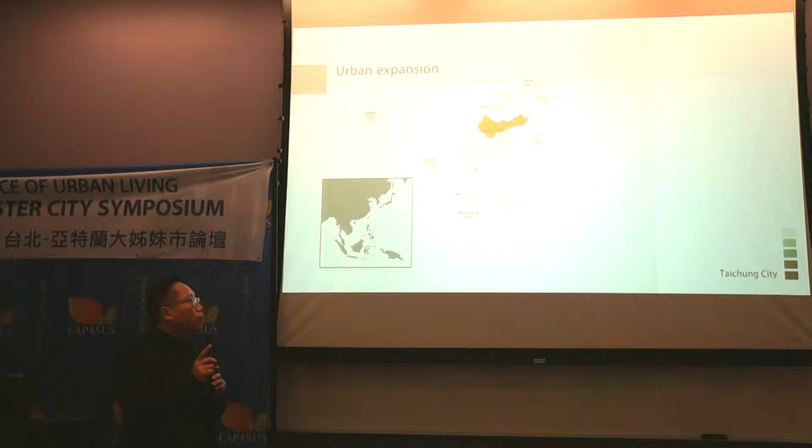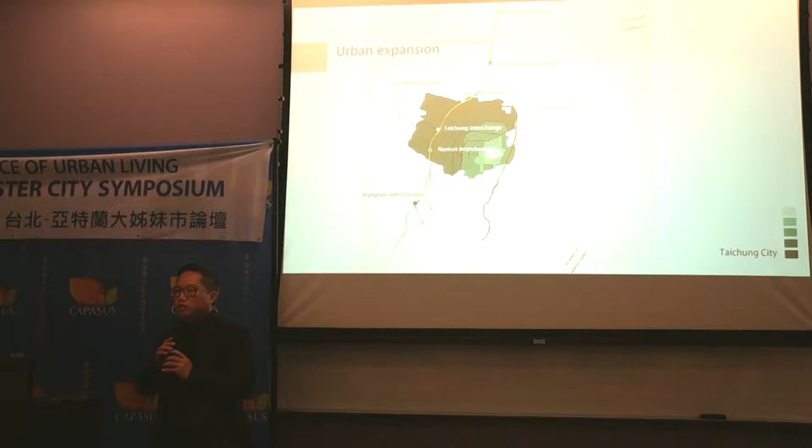Taichung is a city of 3 million people in the center of Taiwan Island. When the last mile of Taiwan railway system was connected in 1908, Taichung started to boom and grow well, and just like other cities of the world, it kept expanding and constructing. All the traffic system was built, and interchanges and superhighway stations brought people to the suburbs.

The government and funds invested in the suburbs and brought people outside of the downtown, so the downtown got abandoned and vacant.

Since the change is destined for the city, what can architects do for it? Still design buildings, or be accompanied with the urban evolution?

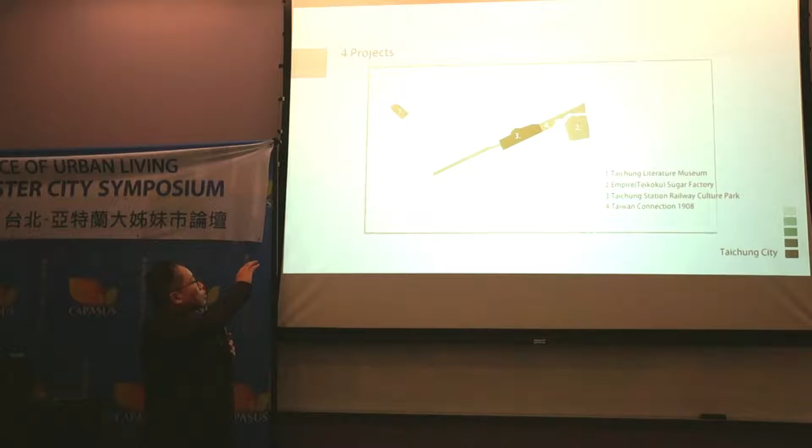So the following 4 projects are what I'm doing right now for my city, all in the downtown and almost around the train station.

I tried to keep all the content and context of history and the elements, and transferred it to literature elements.

The orange one is the site. Half of the site was demolished by the government to become an empty plant, and we just kept 6 dorm houses there.

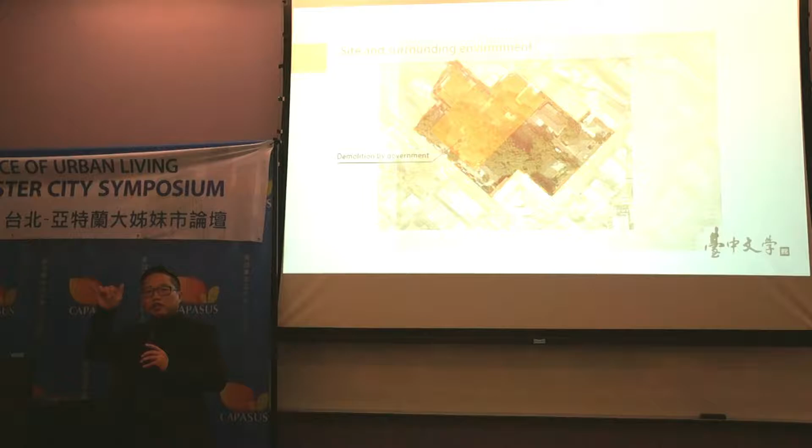Taichung used to be called a cultural city, but not now. Embarrassing. So when I started the design, I had to keep the value system of urban spaces: public, context, history, and sustainability.

So I thought about the boundary of the past. In the past it was fasting/closed. For the future, I have to open it.

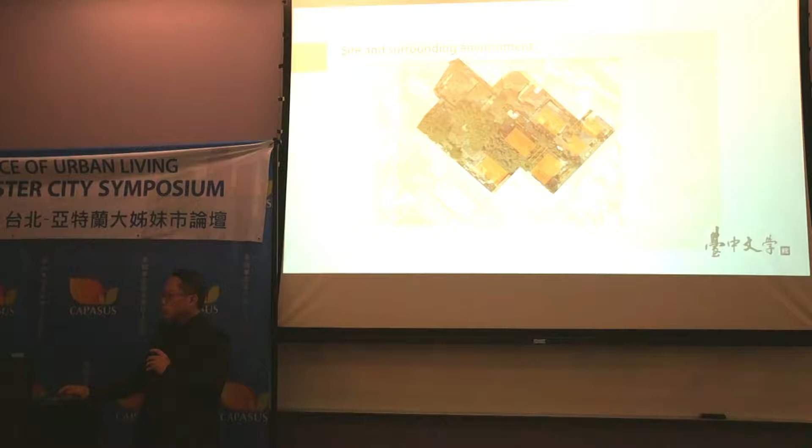You can see the fences separating all the units one by one, but as a whole museum, we have to change it and welcome people from the street.

Let's compare the before and after pictures. It used to be enclosed by the street, and we opened it.

When people saw it was open, they enjoyed stepping into the garden to join all the events inside.

But something about the internal context of the past - you can see they were divided, but we have to open it inside to merge every unit and put it all together.

So we have to find the clues of history. In the past the government demolished it, but I told the government we have to revive it.

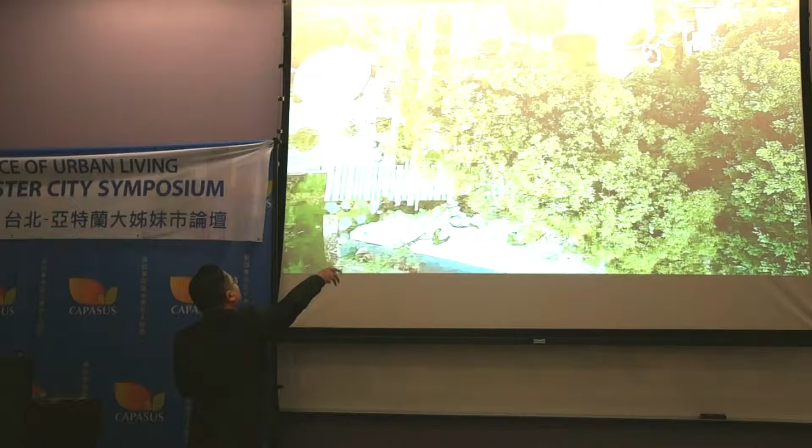Some furniture was put inside, and the pavilion for people to rest in. Many kinds of trees, to inspire people and remind their habit in reading, in writing. You can sit in the pavilion, read your books, play on your cell phone, and just take a snack.

So people enjoy it, and it attracted 1 million people to visit here in the past 4 years.

Okay. The second project that I made is the Empire Sugar Factory.

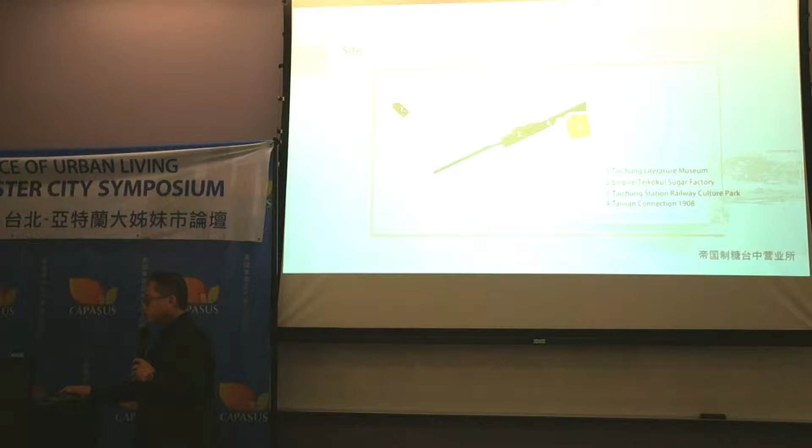The gray belt is the railway station, the railway road of Taichung. It separated the city into two parts, and the sugar factory is in the industrial area in the backside of the city.

It stopped its production in the 1990s and was acquired for a huge commercial project, but it failed because of the financial crisis. So the site was abandoned for 2 decades.

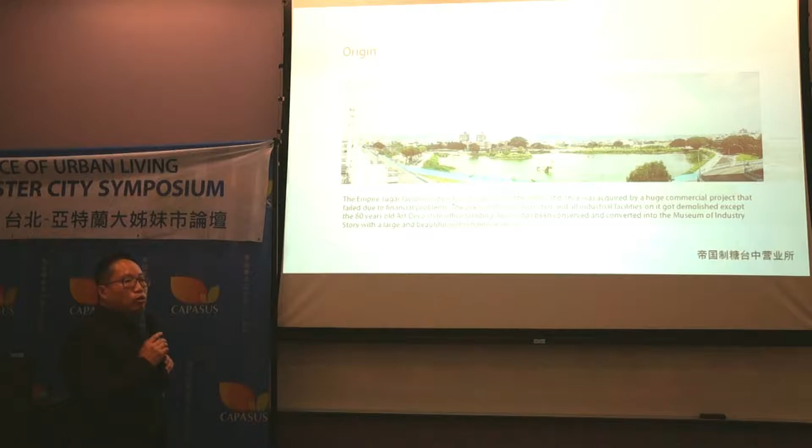So now the building has been conserved and changed into a museum of industrial history with a large and beautiful surrounding.

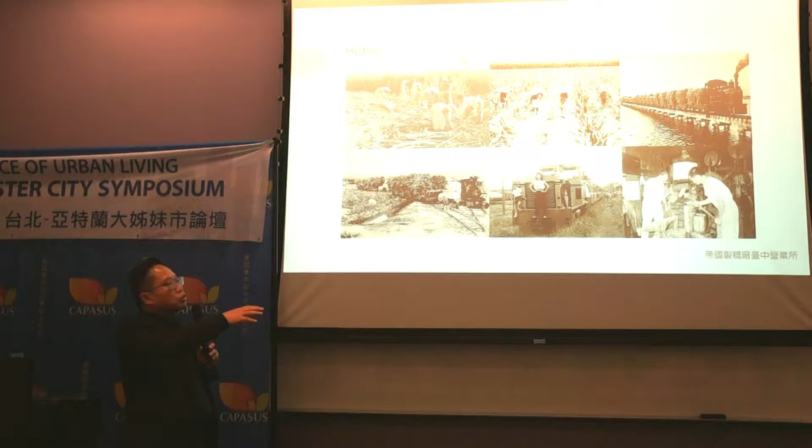Most of the history has been demolished. Now we've kept some of it. There's a section just at the back side of the train station.

Abandoned for 2 decades, but it's beautiful in the decorations outside, and in some details of the truss and its tile.

So the first mission for me is to restore the historical building. I repair it, and more than restoration, you've got to reuse it.

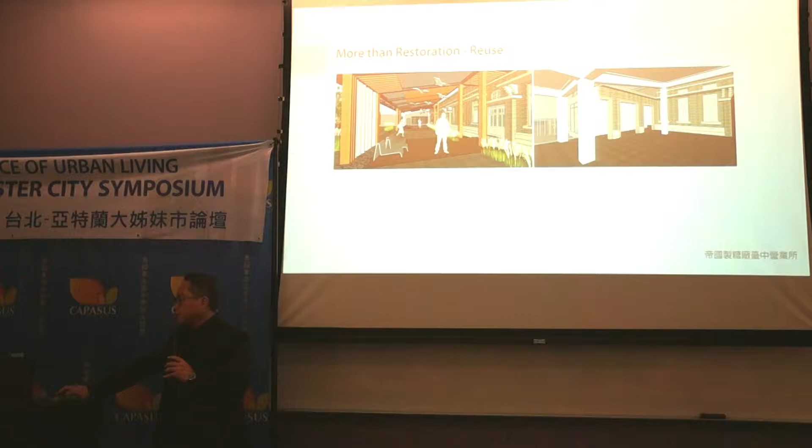A restaurant beside the lake, and more than that, we have to create open spaces and beautiful lights at night.

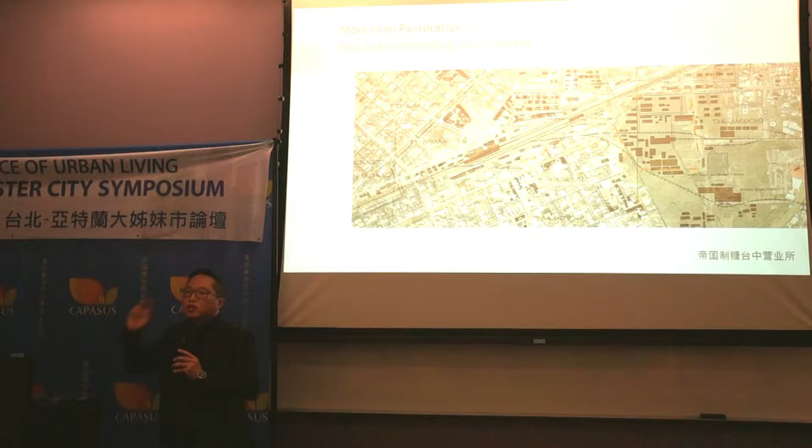And something about the surrounding and the city. So we have to consider the relationship connecting the surrounding district, even the surrounding town.

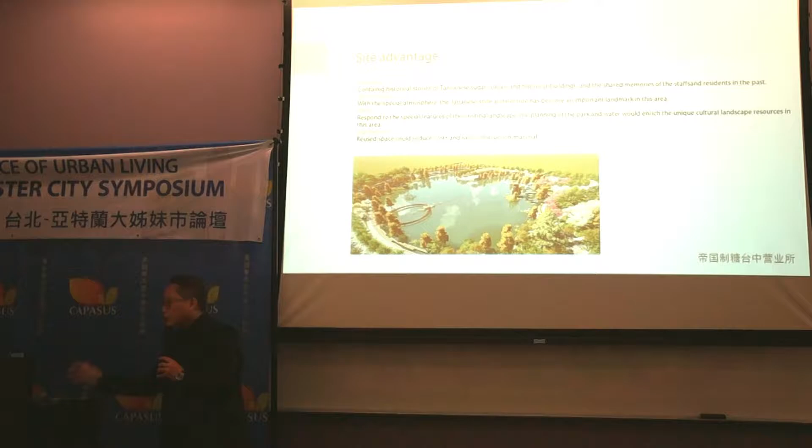So some of the historical clues have been kept. We can say it has the potential of memory, historical buildings, and a park for people, and a setting for children. So there's a master plan drawing the corners, the spots, and the paths of the park.

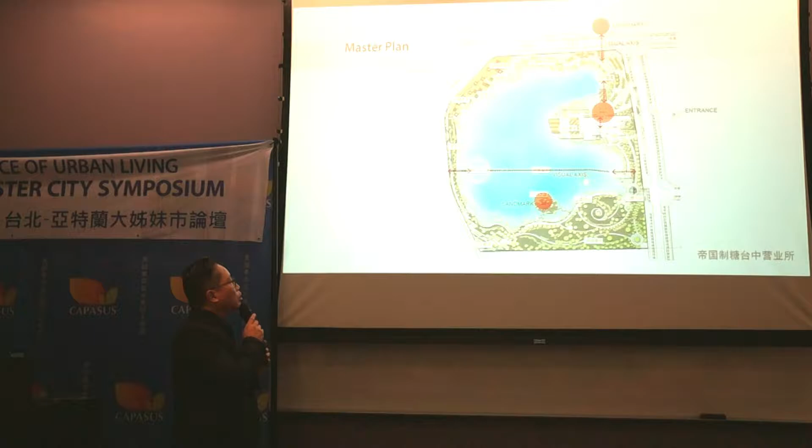The master plan includes a very important clue: the tracks of the railway from the sugar factory to the railway station, which were removed.

So we have to highlight the old buildings to be the symbolic things in this park, and represent the trace of the railway from the sugar factory to the train station.

That way we can show the connection to the past, the industry area and transportation.

Bridges were made for people to enjoy, and the waterfront is always popular, along with the forest and the plaza. But the functional purpose of the pool is for flood detention.

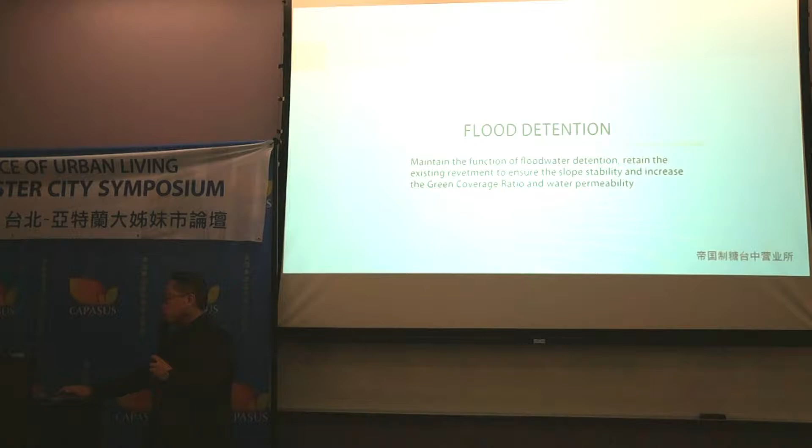In the waterfront, people can sit here and enjoy the water. So it will become a very, very good environmental education spot for the city.

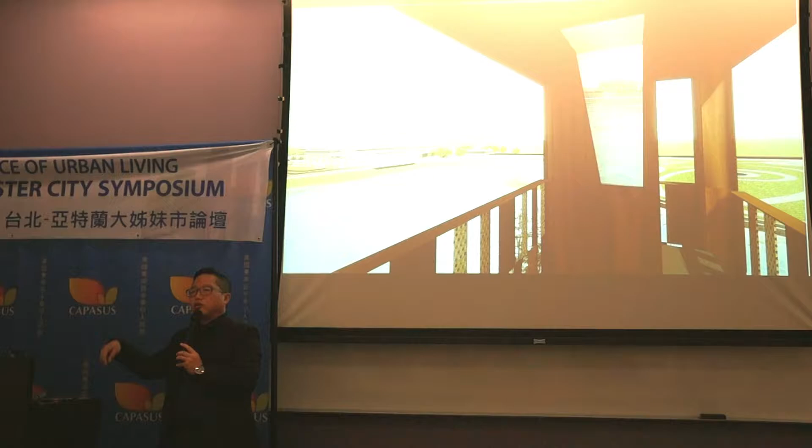We made a tower for people to step up and take a whole overview of the surroundings, so they can know the connection between the sugar factory park and the Taichung train station.

All we have done is for people, for humanity. So people walk in here, enjoy it, and find themselves and find the history of this place.

Let me show you a video.

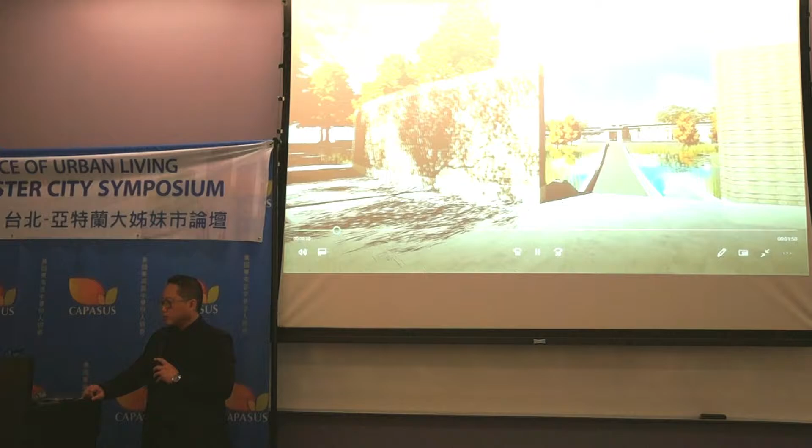So we got the orientation from the train station to these old buildings and got some waterfalls beside it, and some platforms for people.

So we made many biodiversities in this park. The fountains, the water gate, and made some paths in the forest. And when you step across, step on the bridge, you can step on the tower and just look all over the surroundings.

So it changed from abandoned factory to a popular park. It's under construction and will be done this year, the end of this year.

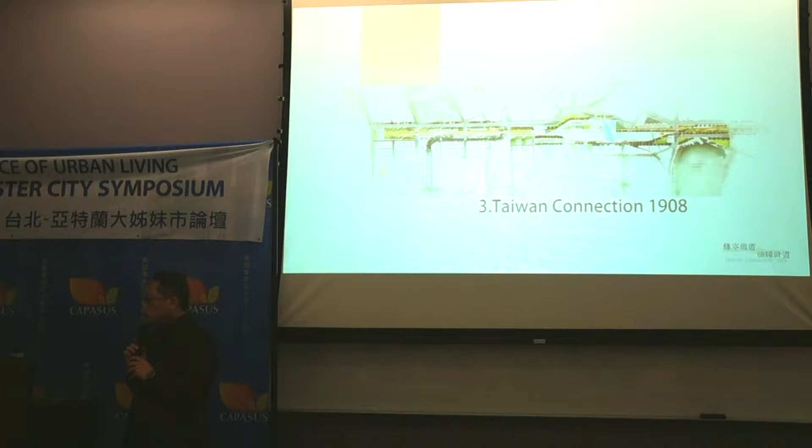Then the third project I have to show you is Taiwan Connection, 1908. The site is the old railroad. 15 years ago, the Taiwan Railway Administration made a decision to elevate the railway.

So we got something to do for it. So let's get architect, me, and mechanical, and some engineer and expert join this project. The total distance is 1 mile, in the center of the downtown.

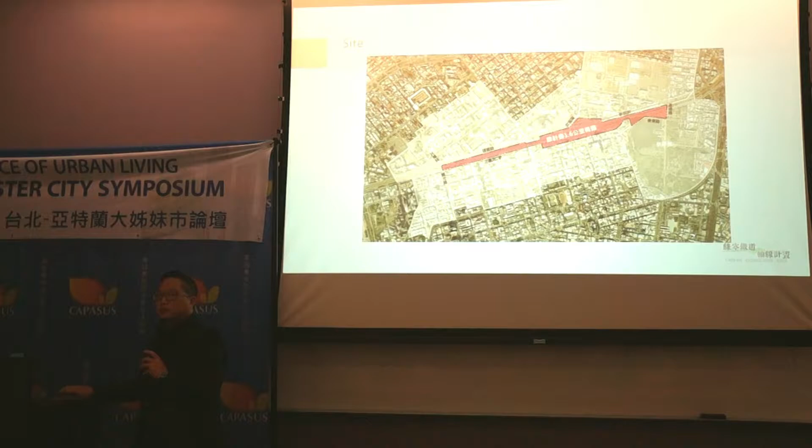It's the birth of Taichung city. Just because it's just like Amazon, it's a transportation platform for this city. So many historical elements are still kept today.

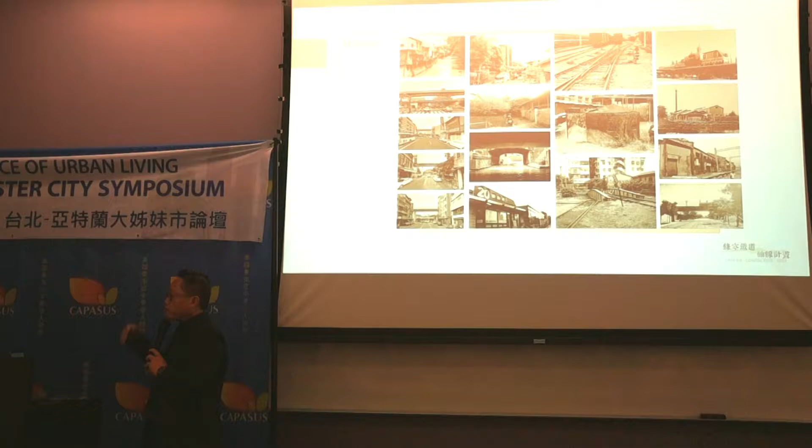So how can I keep it? For the memories of the past and for the future. So people start to think there should be something we can do for it. We have to preserve it, not just only because the parking lot for the residents.

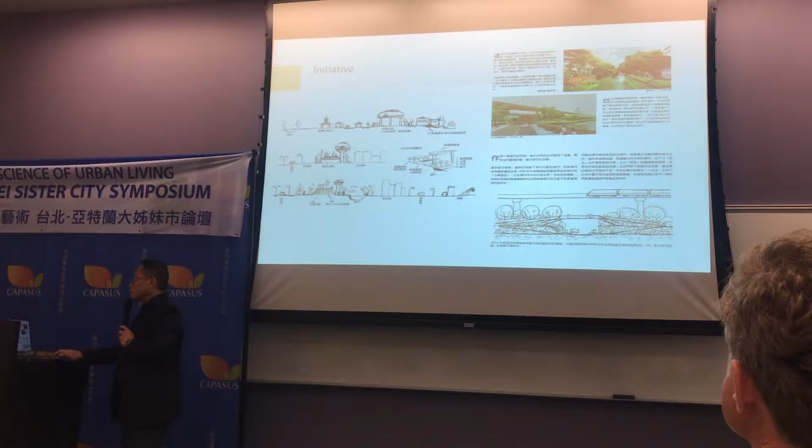So we start our initiative and do a lot of things to tell people the importance to keep it. And the tour guide, the newspaper, and many speeches and workshops, and tour, and farewell concert.

That movement attracted many experts to join us, including architects, railway experts, an engineer, and the retired staff of the TRA. Then the Mayor Lin caught the idea and took the initiative and turned it into the policy of government.

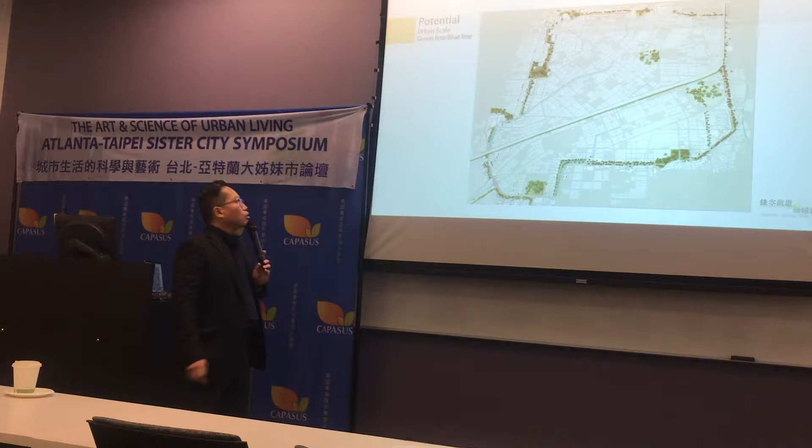The government thinks they want to make a green circle just surrounding the downtown, and connect all the important spots of the city. But it's a long distance, it's just a big circle.

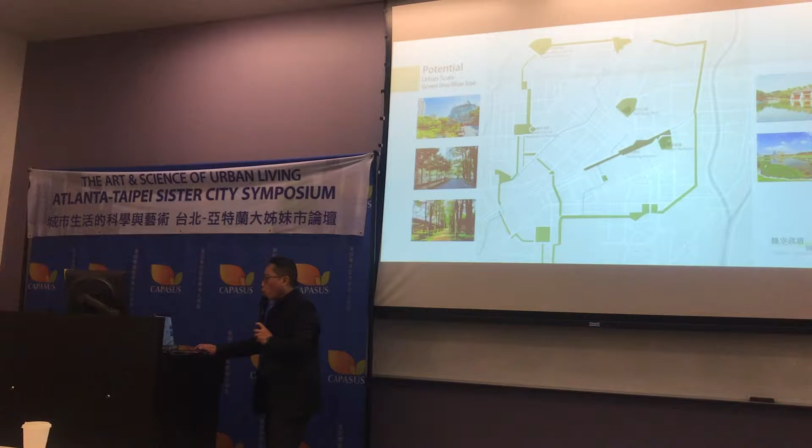And when the railway is conserved, something different, something fun happens. And I see people move around the downtown. You can choose a small circle, a medium circle, a big circle, whatever you need.

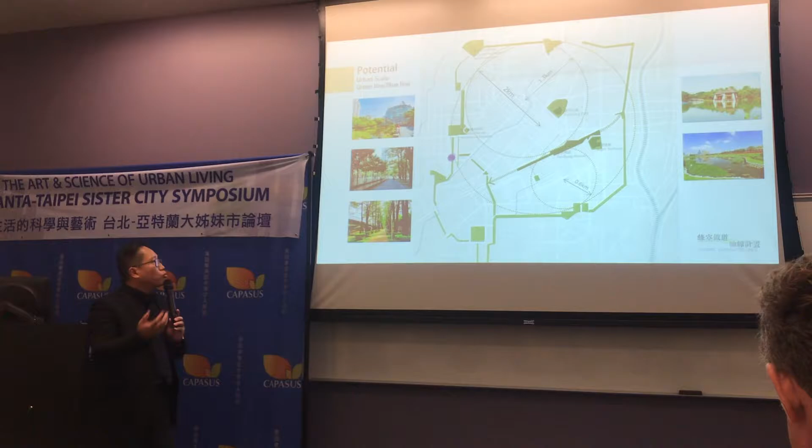So the downtown became very interesting, with many opportunities and options for you to move. So all the historical places, buildings can be connected as well. You can see.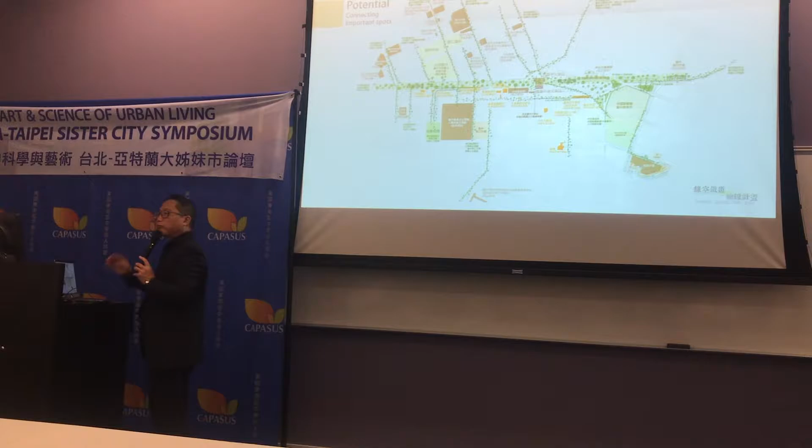So people can get a lot of fun in the movement. Communities surrounding start to think how to connect their communities to the railway's green belt. And different tour routes happen.

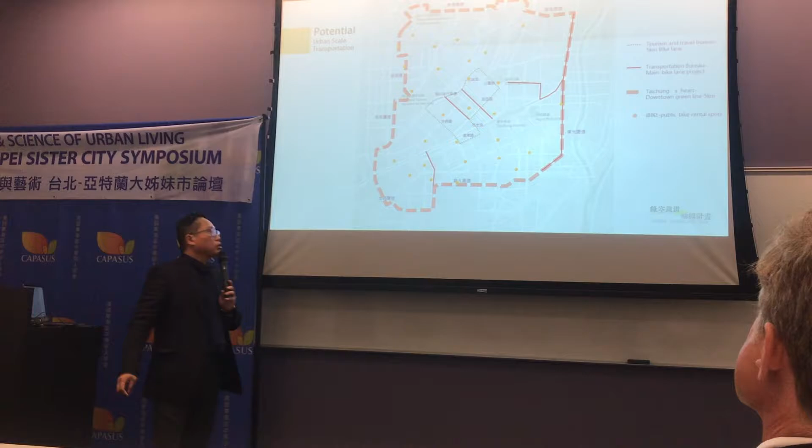So this city in the past is for cars, and now it's for people. And the government tried to build a bikeway all around, but it cannot make it in the downtown, in the center of the downtown. But now you can, and now you make it.

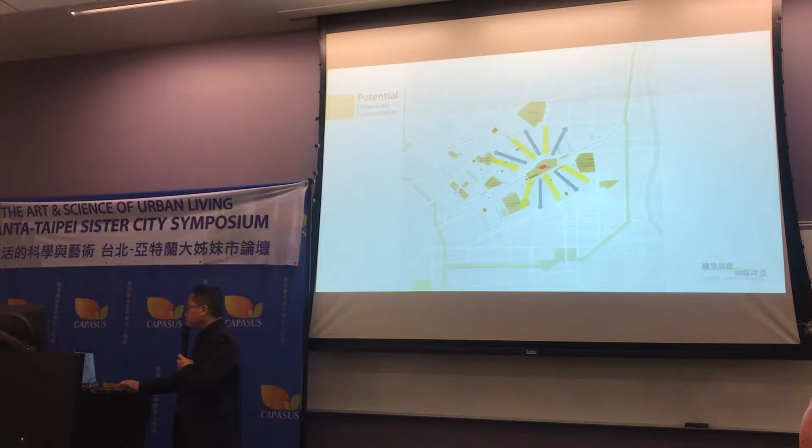And in the past, it's the only way for people to come and go to the train station. But right now, we have different options, within the downtown area. In the past, the railway separates the city into two parts. It's a barrier.

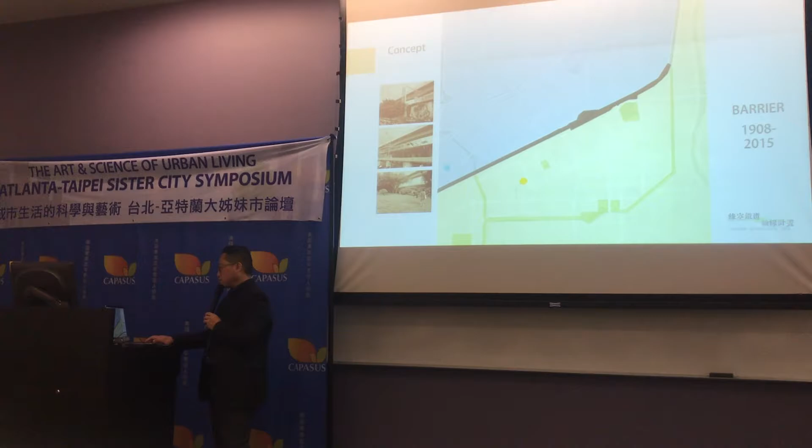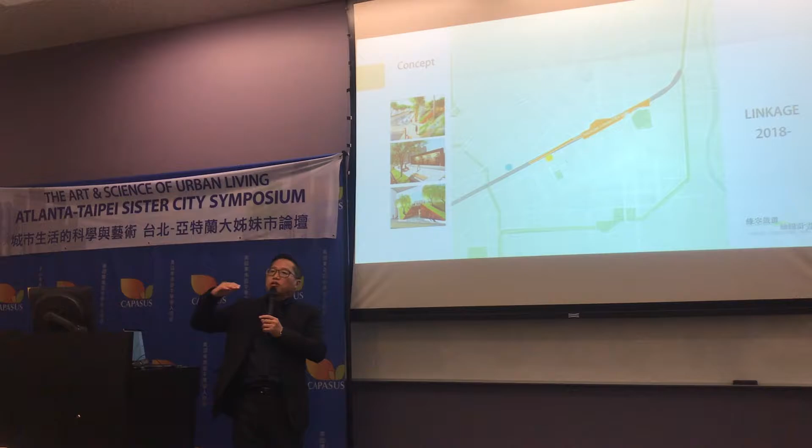Okay, so since the railway is elevated high, people can pass through, but it just passes through. Now we create a vertical garden and a platform to bring people together. It's become a linkage.

So we faced a very, very tough work to negotiate with people. We gathered professional people to discuss with the citizens and find the problem, find the issues, to change it, become the design strategy.

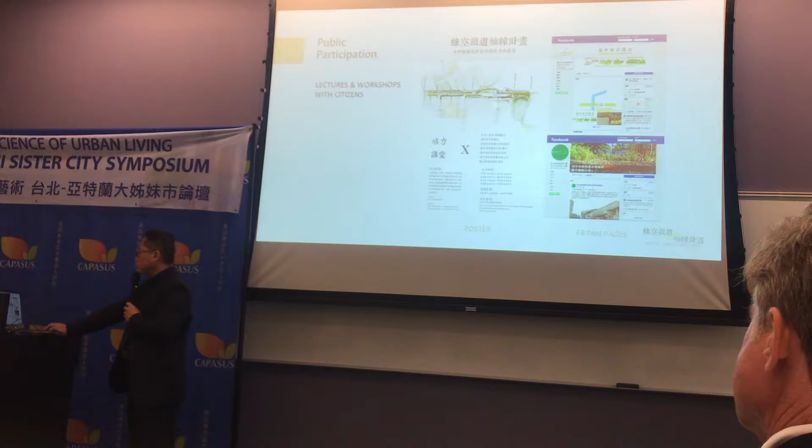Many discussions, many workshops, and tour, and on the website, and concert, and speeches, and discussion. So the main end goal of this project is to create accessibility for the communities around. So we give some tunnels, some ramps, even elevators.

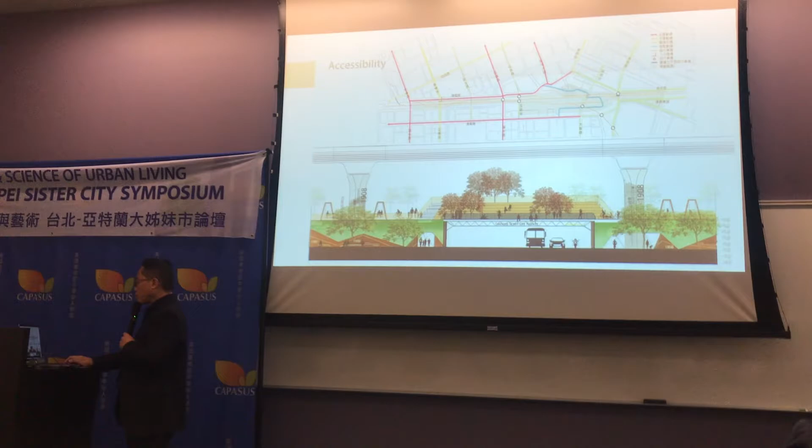Kind of double or multi-layer of garden. Outdoor cinema. And all the elements of railway were kept.

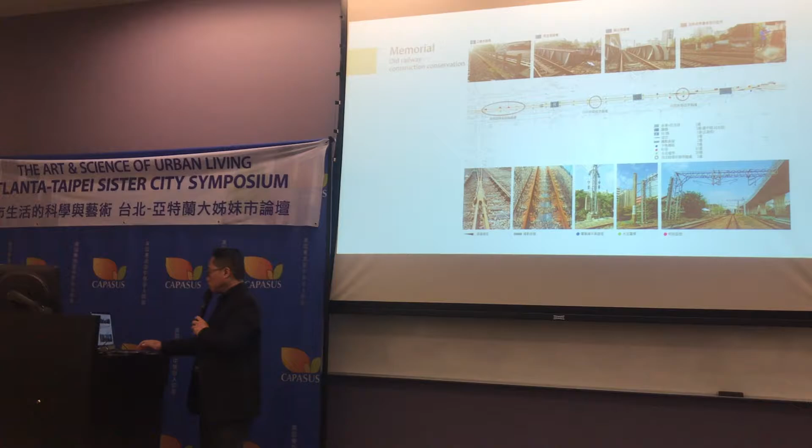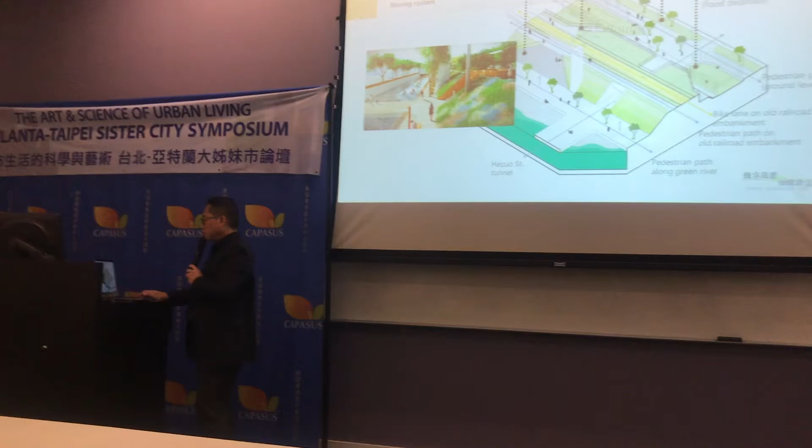It used to be a 4 meter high embankment. We kept it, even the signage system we designed it.

So I want to show 2 videos. Sorry.

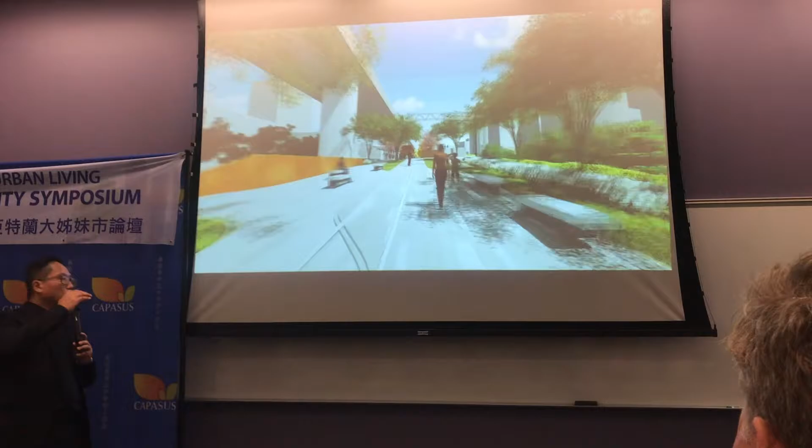So people can walk on the green belt at different heights to see the city and get a different point of view of the city.

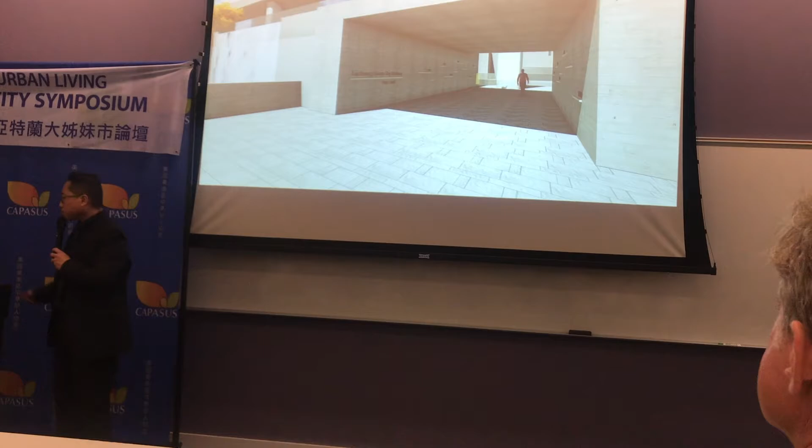And make some tunnels for them to connect, to bring the community people all together, and become the gallery for them to show the history. And the riverside also has some signs.

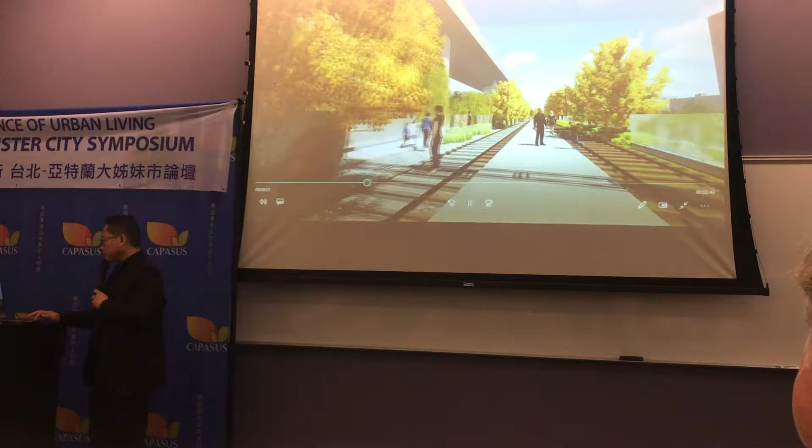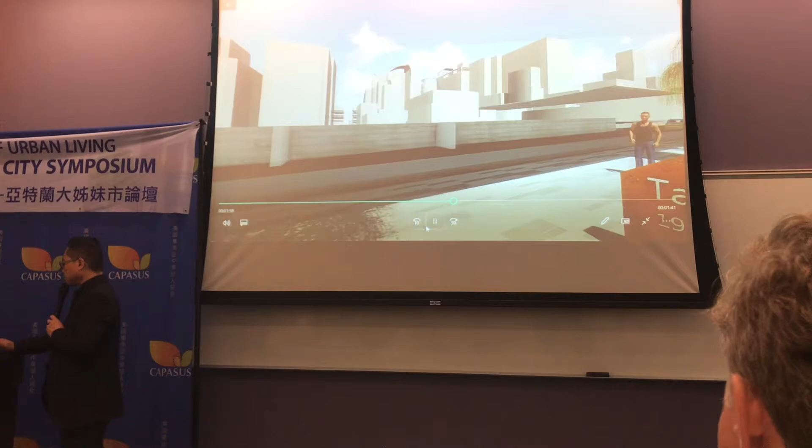And the bridge becomes the gate of the city. We build some pavilions and restaurants for people, where they can take a rest.

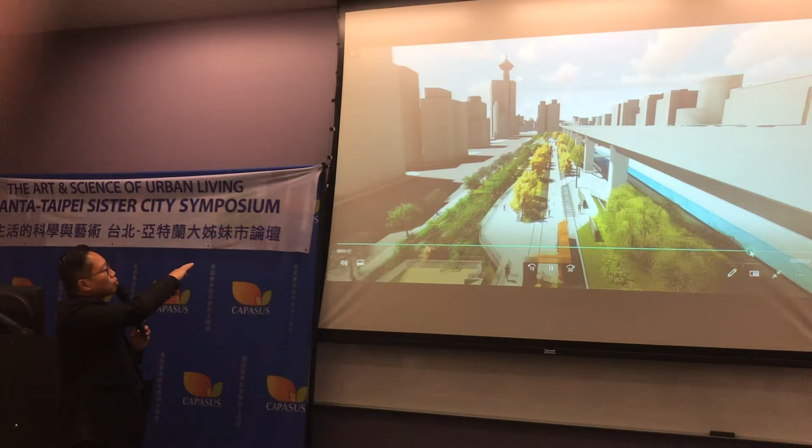So when we approach the train station, you can see it crosses many kinds of communities, spaces, and roads, and people can walk on it without going down to cross the traffic light.

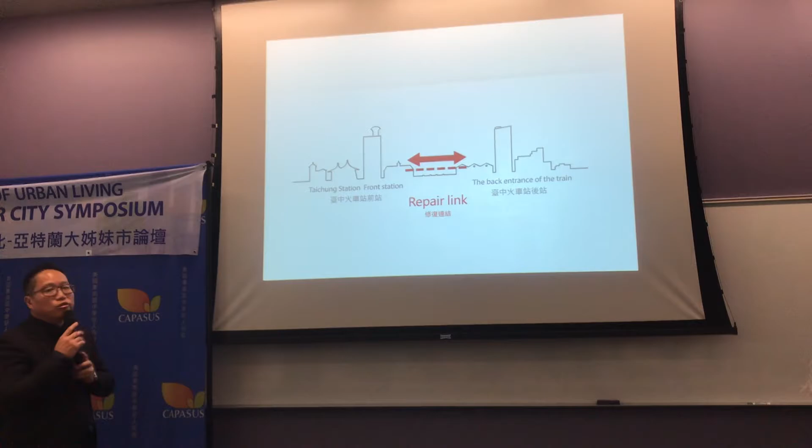The north section is more difficult to design because many buildings stand surrounding it, so we have to build a skywalk to connect the station and the sugar factory.

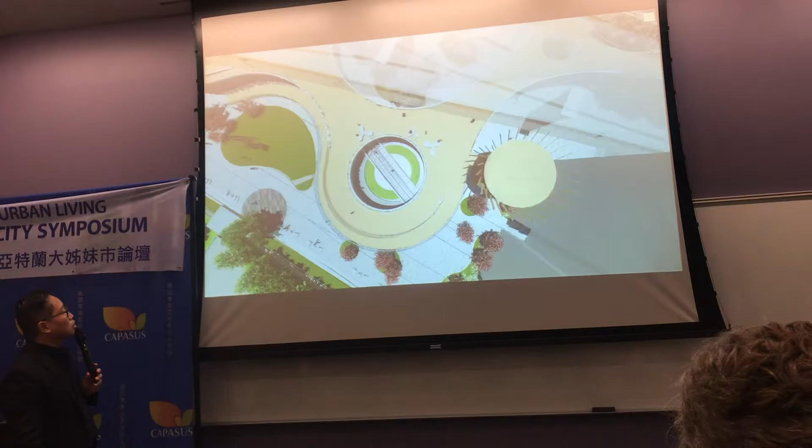And some railway elements and some ramps provide some shadow for them, like that.

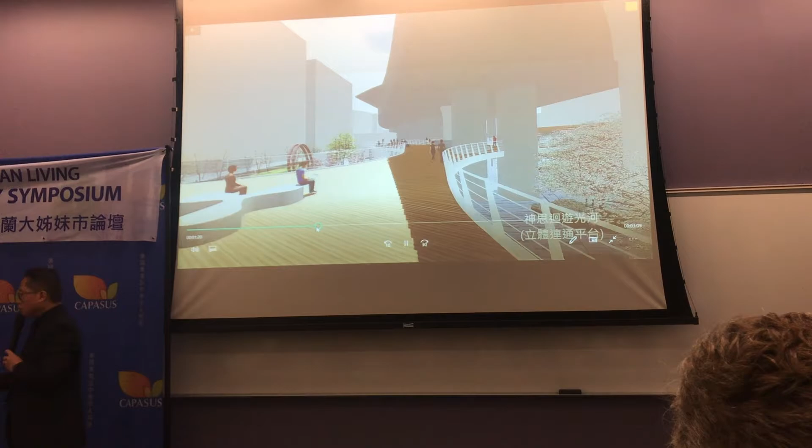So people walking on the platform, walking on the balcony, they can get a different viewpoint of the city, and see the connection of the factory area and the warehouses of the train station, the heritage and historical buildings.

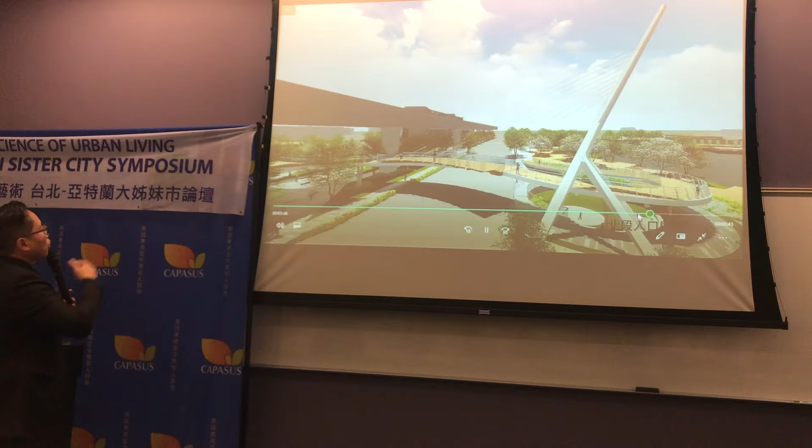The old stock house gets a skywalk to the sugar factory, with an elevator and a staircase.

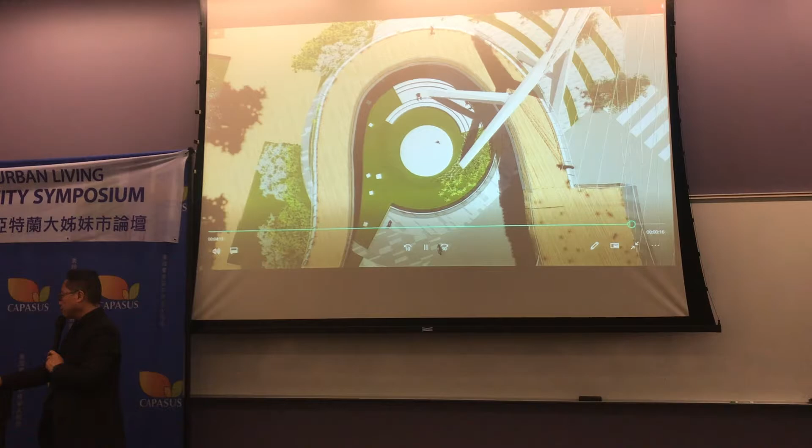The last project I want to show you is Taichung Station Railway Cultural Park. The Taichung train station area - the government put over 4 projects surrounding it. It's very important, so it's not just a park, it's a park that's related to railway culture, life, and innovation.

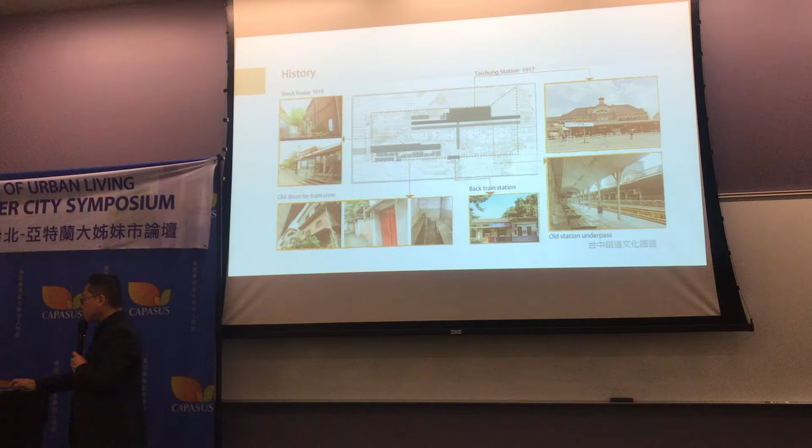Many historical buildings and heritage monuments are still here. We have to keep them and turn them into highlighted, symbolic things in this park. And we've got the first generation, the second generation, and the third generation, which was built last year.

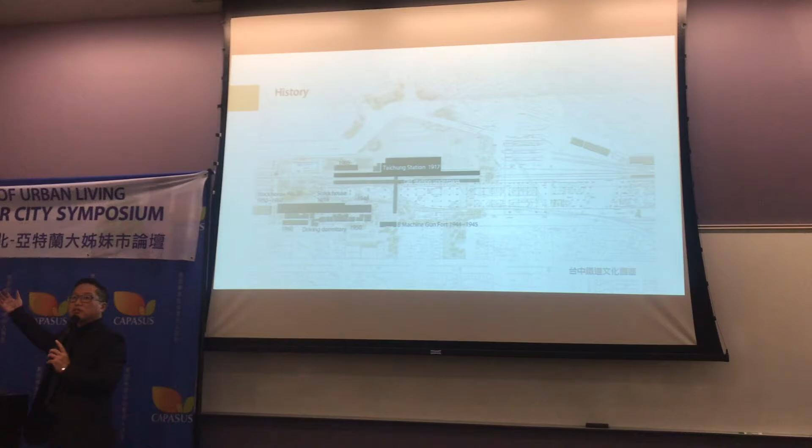So it's a very rare thing in the world to have 3 generations as part of a railway station, along with some stock houses and railway facilities. So we created 3 vertical axes and 1 horizontal green belt for it.

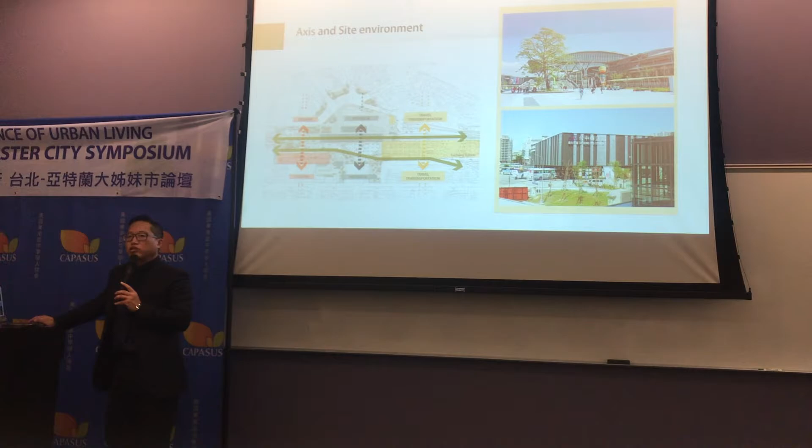The train station and bus station are for transportation on the right hand side, connecting to the shopping mall and commercial buildings. The central line is for historical monuments.

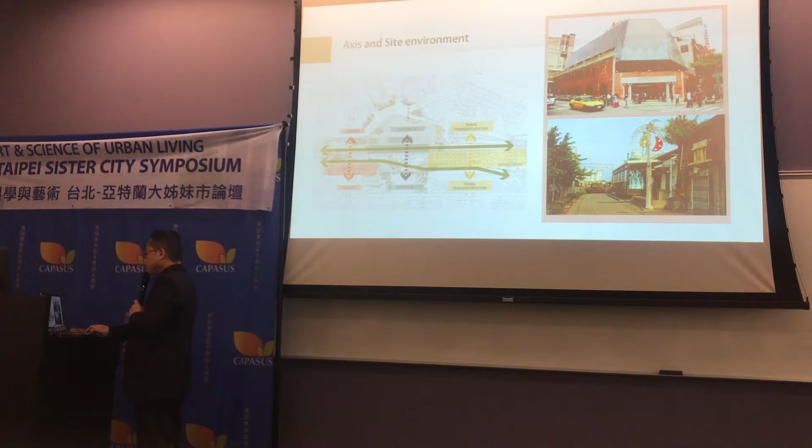And the left hand side is a line to bring in the famous restaurants and houses, and some space for artists. The young people like it.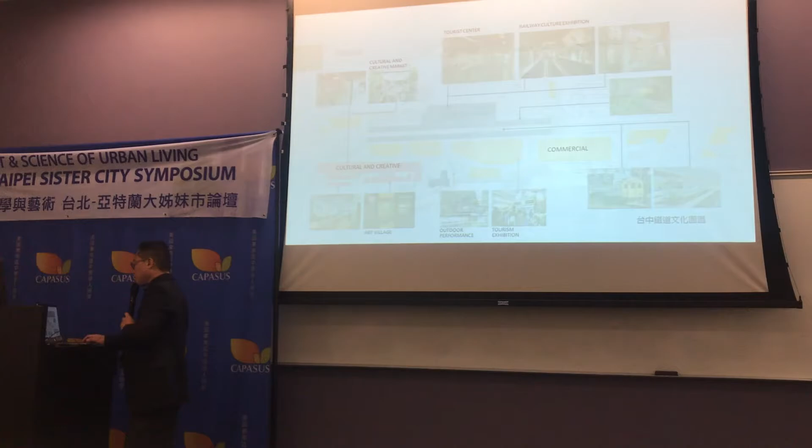So it's not only the reuse of the old buildings - we need to put in new spaces, new commercial areas for the future, for the young people and for visitors.

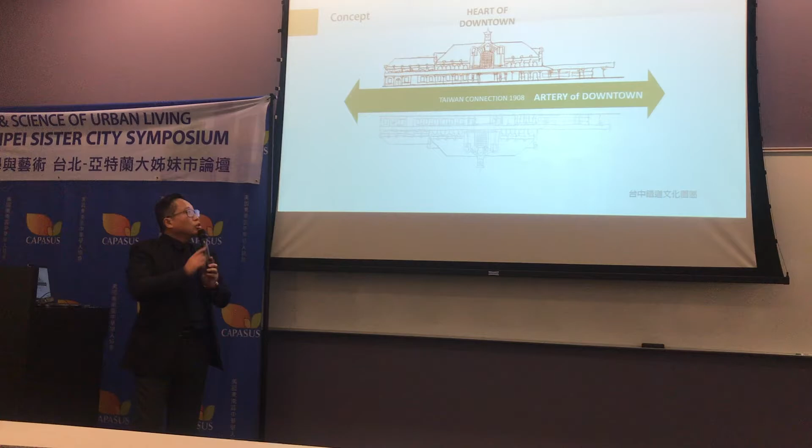So we define it: the station is the heart of downtown. The green belt we just talked about is the artery of downtown.

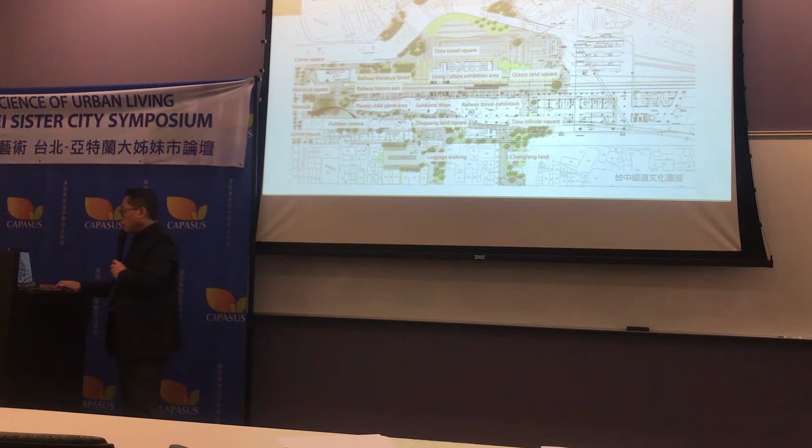So the new buildings we are designing right now have to be light and soft, to make the old historical buildings the spotlight, so we cannot conflict with them - our buildings, the renovations we make, and the new things we put in.

We create many plazas, about 6 or 7 plazas in the orange circle, for people to get in.

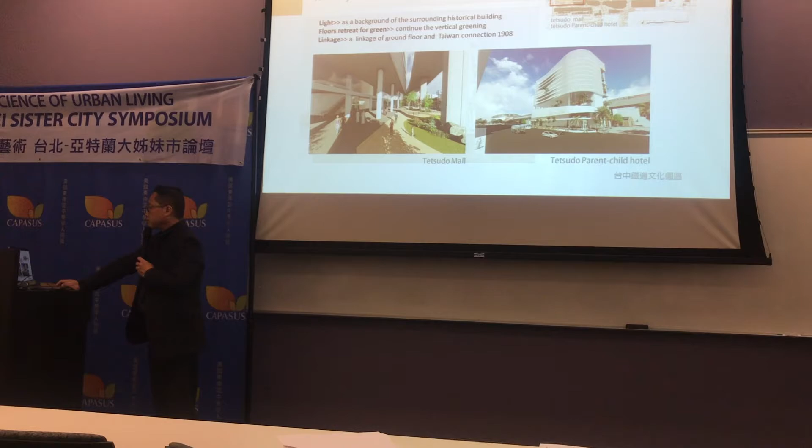A very clear fence for people, for buildings, and grasses - and the glass bubble is for commercial uses.

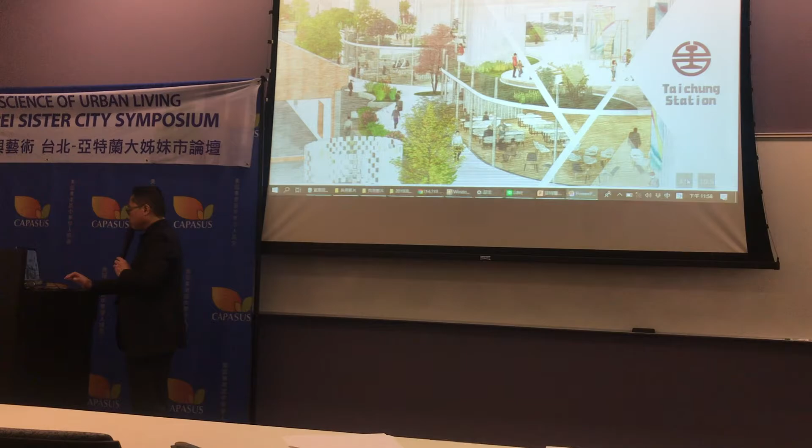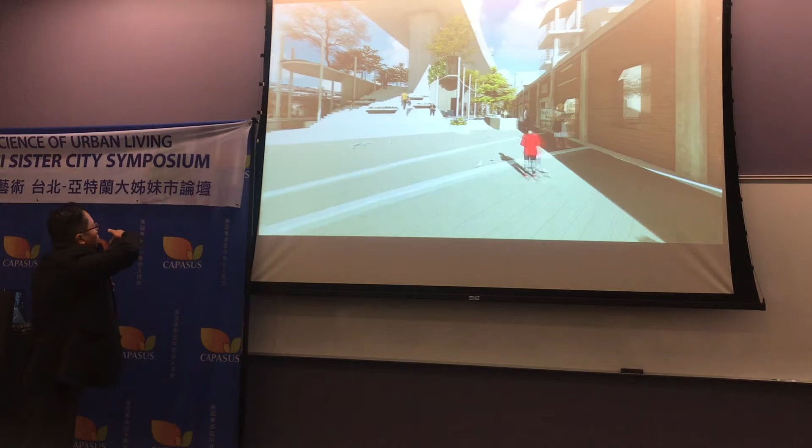So people can get into the park directly from the street, and we open the ground floor. They can experience the old stock house, step on the rooftop, and walk by the glass bubble to join the restaurant, the cafeteria, the bookstore.

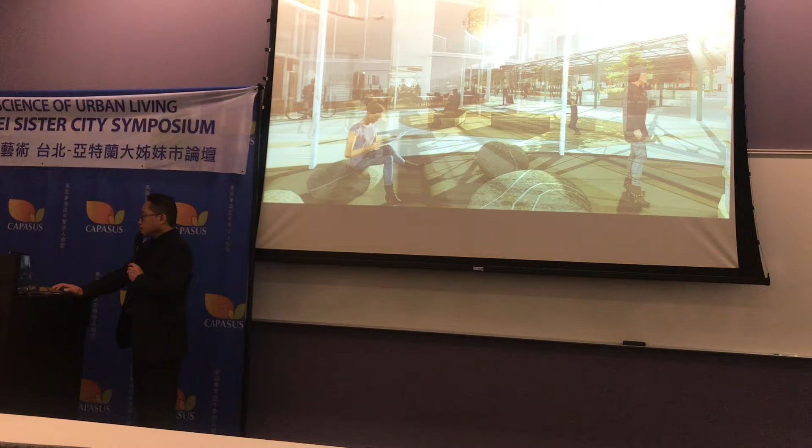People can see all the historical buildings side by side, standing from here to see the buildings there. Bookstore here.

People can walk to the plaza. You can choose to go to the hotel or to visit the bookstore - that is for traveling.

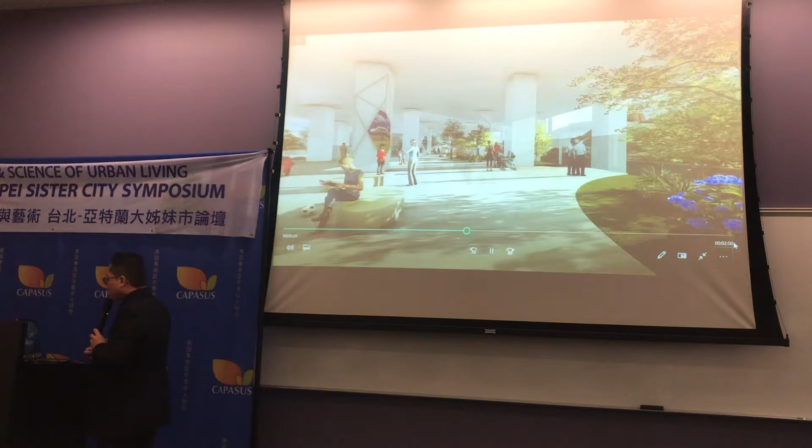And the cafeteria. And on the balcony, they can stand at this height to see the monument, the old station, and the play grass here.

All the warehouses can be transformed into galleries on stilts.

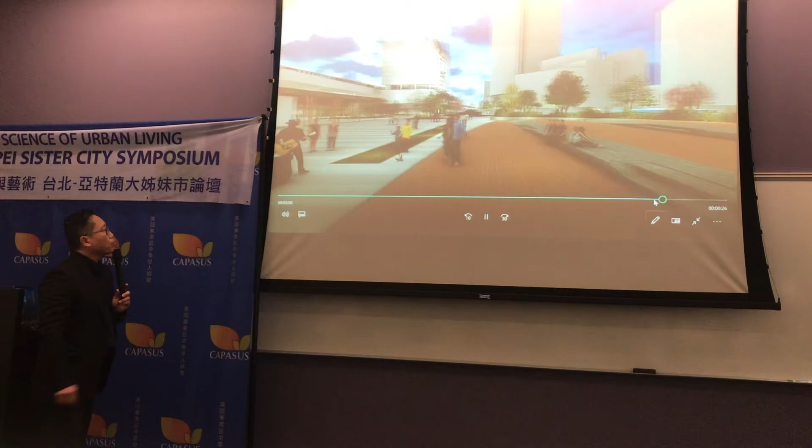And people walking on the platform should experience the history of this building and railway culture. And the plaza in front of the station will be open to the city, welcoming people to come in.

This is what I'm doing for my city, Taichung. I hope you can enjoy it.